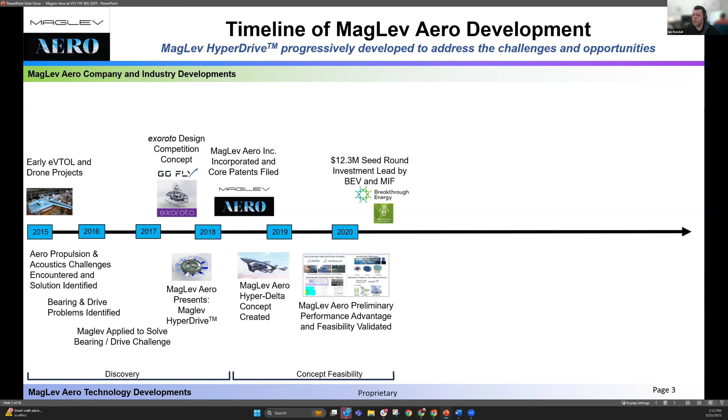So brief history, worked on a few projects, ended up spinning out from a competition called Design. It was the Boeing Go Fly competition, where the objective was to design, build, fly, test a small under 8-foot VTOL system and fly it in a course. We ended up pulling out of that competition, spinning out the core technology, starting Maglev Aero from that, and worked on the core technology validation, raised a seed from Breakthrough Energy Ventures and Material Impact, filed the core IP, and since

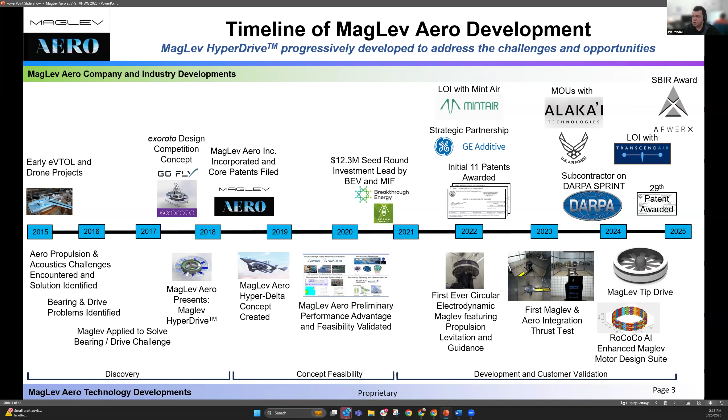then have been busy. We've gotten all of our patents, done a few partnerships, performed a subcontract under DARPA on the Sprint program, and then also developed a demonstrator of the core initial technology platform, which was a maglev rim-driven prop fan with individual blade pitch control, and learned a lot about these maglev motor systems, the losses of an open fan system, and have developed our launch product, which is these tip-driven systems for high thrust capacity.

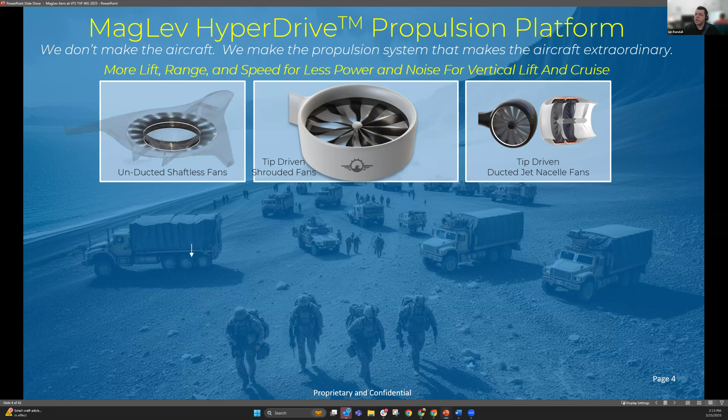So at the overall level, think of us as a maglev motor fan integrated system with a few different embodiments. There's on the left, the hub-driven system that's seen on our website with that tilt rotor, tilt fan in wing around the body system. There are also these tip-driven shrouded fans that leverage a magnetic bearing motor system at the rim of the fan. I don't know if you guys can see my mouse, but at the rim of the fan, that is the similar application with pretty outstanding sets of benefits, and then high-speed applications that we anticipate will follow shortly after.

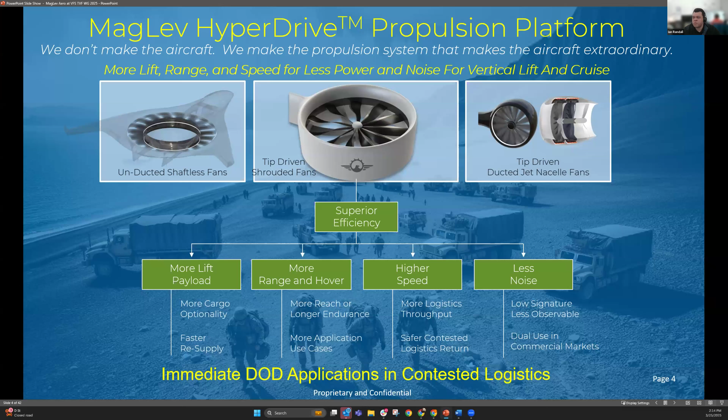The overall net objective is really efficiency. Improving your efficiency has a pretty outsized effect on the overall vehicle performance capabilities. And so that's what we prioritize with these vehicles. And we make sure that we don't do that for higher costs and weight as well. But if you can reduce the power required for VTOL and/or cruise operations, then you open up a lot more space on the vehicle for either payload or fuel capacity for range or endurance, and that tends to matter.

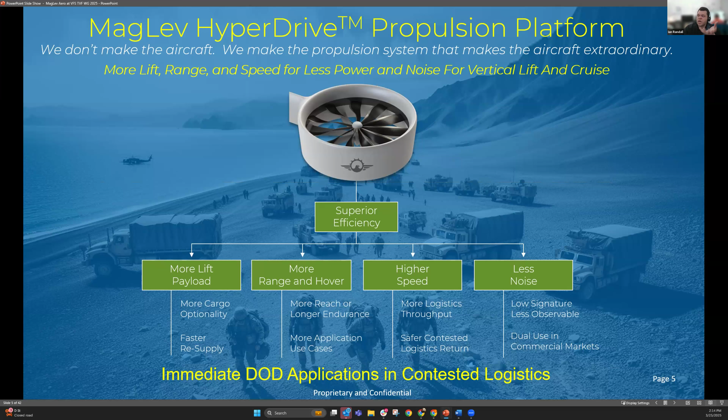So this presentation is going to focus on the tip-driven applications, and this is our tip-driven maglev fan system. We call it the TX series. But high level, we take technologies more commonly employed in high-speed linear maglev, and we wrap it in on itself. And we had good fun making this visualization, because essentially that's what we're doing. It's a big linear motor turned into a rotating motor, which at the end of the day for electromechanics, they're the same thing. This has those two embodiments, the hub-driven fans as well as the tip-driven fans.

So instead of the blades sticking out, the blades are sticking in, and that has some pretty outstanding benefits where we can load and power these things with less losses and higher power density. And so it has two different kinds of embodiments. They are used for vertical lift for fan in wing, fan in duct, fan in tail, fan in body, shrouded fans, where you install multiple or a single one of them in the body of your vehicle for high thrust and high bandwidth kinds of applications where you want these fans in a lift plus cruise kind of configuration.

We also find that the torque and speed of that fan, while good for high disk load hover applications, is also quite well matched for fairly high speed ducted fan applications as well. And so these are two areas that we focus on. And I'm going to be talking to you about the vertical lift applications, because this is the Vertical Flight Society. This is where we make things go up.

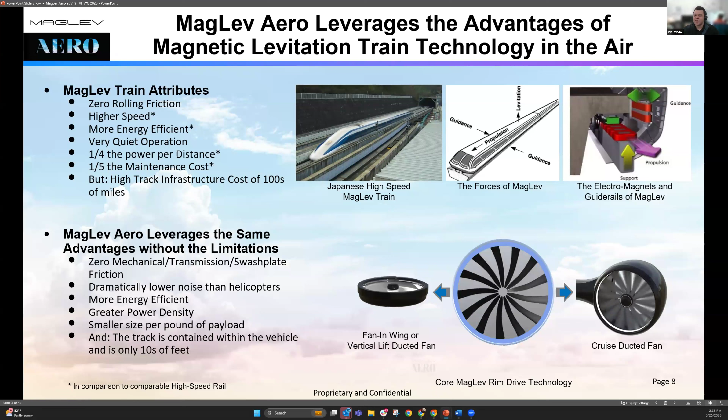The reason why we go sufficiently far out of our way with maglev is because rim-driven things are actually fairly complicated. That's why we don't see too many of them. So rim drive is, you imagine, a big motor, big diameter, very large moment arm. You get a lot of torque per unit mass involved in that system. This is all great stuff. The challenge is that oftentimes when you add a large motor out at a fairly large diameter, it adds a lot of destabilizing forces. Think about it this way. If you were to take a magnet, which I usually have one on my table.

Okay, so I'm going to instead use my pen. Actually, here. If you're going to take a magnet, which is this phone, and your steel for your stator, as it gets closer, it wants to be closer at a much faster rate, basically with the inverse square of that distance. And so if you think about a very, very large diameter motor system,

as the rotor has small deflections just due to the unsteady loading, the imbalance of aerodynamic forces, the inertial loads, the imbalance of the inertial loads, whatever the case may be, as those structures deform where nothing is rigid in these high-speed applications, and as they get a little bit closer, you can create fairly large, attractive destabilizing forces just from the electromagnetics of a large motor system.

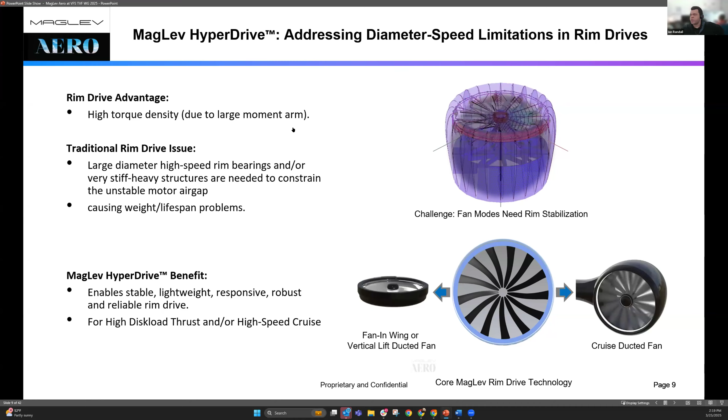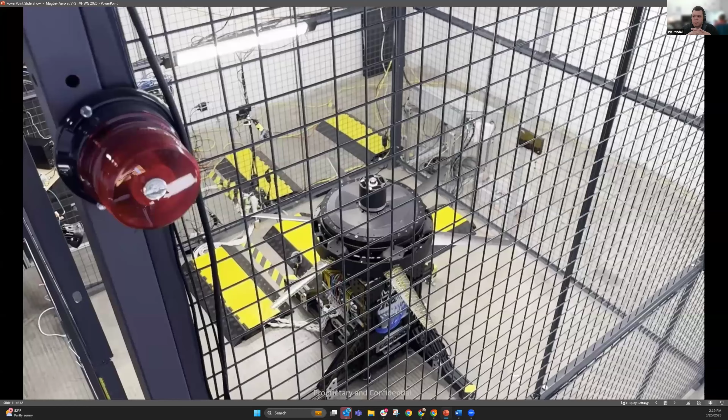This is a quick video of our test rig where we kind of pulled everything together. It is, I guess, the first maglev motored prop rotor with individual blade pitch control. I don't know if it was a milestone that many people were fighting hand over feet to try to get to, but we were the first to do it, which is always fun to be able to say.

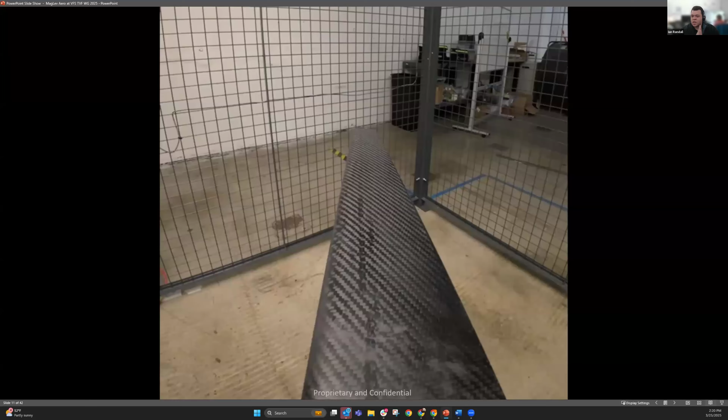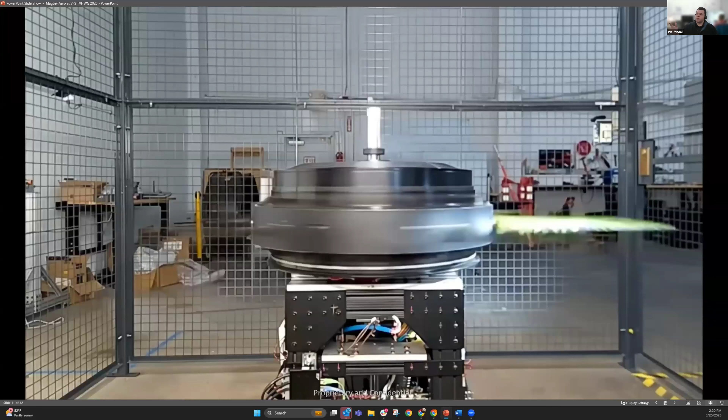In this video, you'll see individual pitch control where we have a servo actuator at the root of every blade. That was important for that large diameter hub-driven system where it has 2 sets of coax rotors. And our maglev motor bearing system all working in unison to be able to produce our target levels of thrust at our target power levels, and make sure that the tool sets that we developed, often from scratch, to do the maglev aeromechanics, basically how does everything shake out and integrate with the aeromechanics and the electromagnetics, are all accurate.

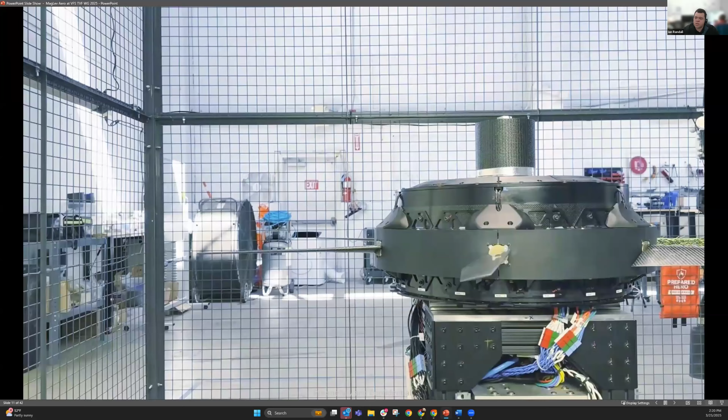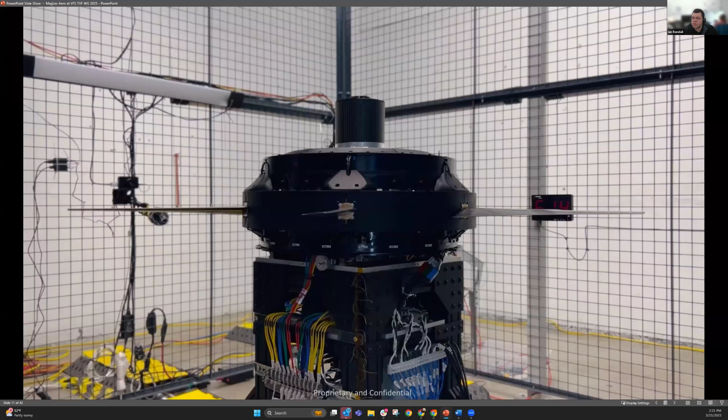So that rotor system is hollow, but inside of it is a large set of measurement devices, a very flexible circuit where we can configure it for either active or passive control or passive dynamics, a 6 degree of freedom force transducer, vibrometers, many temperature sensors, many laser distance measurement devices, many other different state estimation devices, and it has been a rig of ours that we use to validate the tool sets that we use to design these things.

So what are we doing next? We're doing this tip drive next, and I have a prop next to me because props are fun. These tip-driven propulsion units we found address a critical need in some of the challenges associated with producing a fairly large amount of thrust in a fairly confined space and not suffering from a fairly egregious power required to be able to produce it. And so we have our maglev rim drive on the outer portion.

We have internal bearings that help constrain certain motions of the rotor, but as you can imagine, that's a very long distance between the blade and the motor system, and so over that distance you can have various deformations that either need to be mitigated or stabilized, or the effects of potential crashing events between your rotating elements and your stator elements need to be mitigated one way or another.

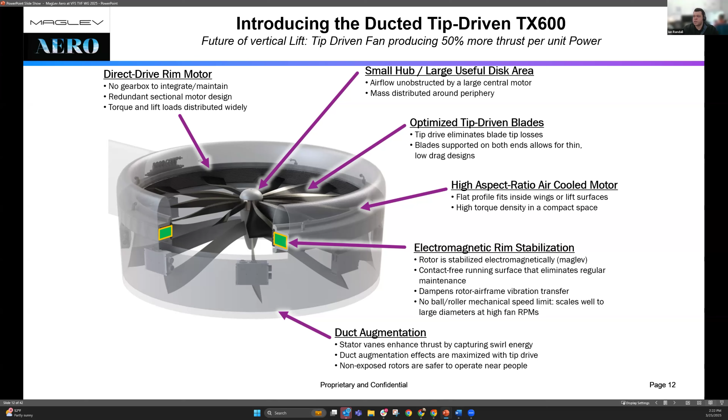And we have a series of inverters distributed around to help power the system. This allows us to have much better duct augmentation, much lower losses in the blades, and deliver the power with a higher power density overall. So the key thing that I'm going to get at actually is going to be the tip losses. If many folks in this community have worked on ducted fans, you probably remember the fairly severe relationship between the tip clearance of your blade and the overall duct hover lift augmentation efficiency factor.

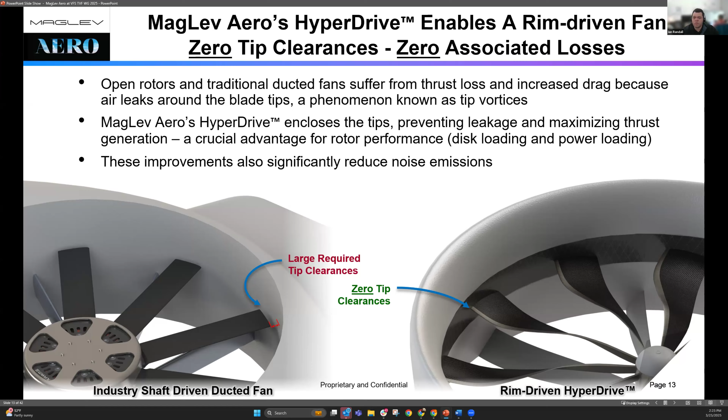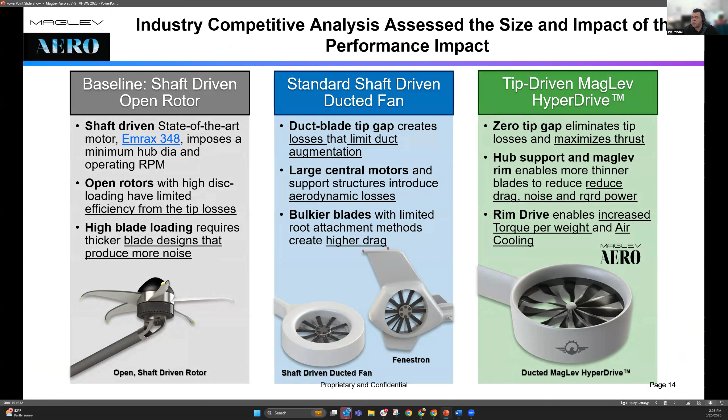And so with a tip-driven solution, you can close off that tip leakage factor, and that has some pretty severe effects on the overall efficiency. So we'd have a very quick comparison between a hub-driven open rotor with an Emrax 348 water-cooled or water glycol cooled, that same Emrax 348 powering a ducted fan or a fenestron, and our maglev hyperdrive TX system, all the same diameter, I believe same tip speed as well. And so, general net difference.

And if you think about sound, it's the rate of change in pressure per unit time. Like a speaker, if you have something actuating a lot, it's going to be a very large source of noise. That unsteady loading can be 20 times louder than everything else in the rotor system producing noise. So it's a fairly tremendous source of noise for the overall system.

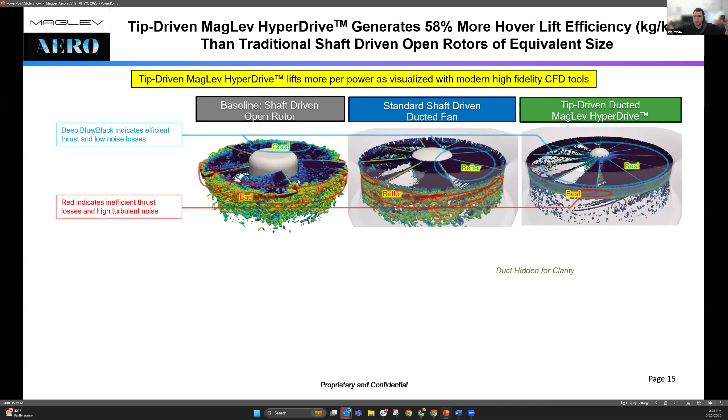So the better you can keep air attached to that surface, the more duct augmentation you can get from it, and the more thrust you can get for the limited area and power that you may have. So a tip-driven shrouded fan solution allows you to keep the air from leaking around the blades, which introduces less vorticity into the downstream of the fan, which promotes better flow adhesion to that duct surface. So for the same duct geometry volume, you can have much higher duct augmentation factors.

The net difference is fairly astounding, 62% more than open fan, roughly 15 to 18% more than the ducted fan. We also have some results showing more dramatically improved cases as well. And one thing to note as well is that there's no large blockage in the flow stream due to the motor on the inside. So we have a much smaller fan core, which helps us maintain flow adhesion to the sides of the ducts as well. So there's less dramatic change in duct area per unit distance down the duct.

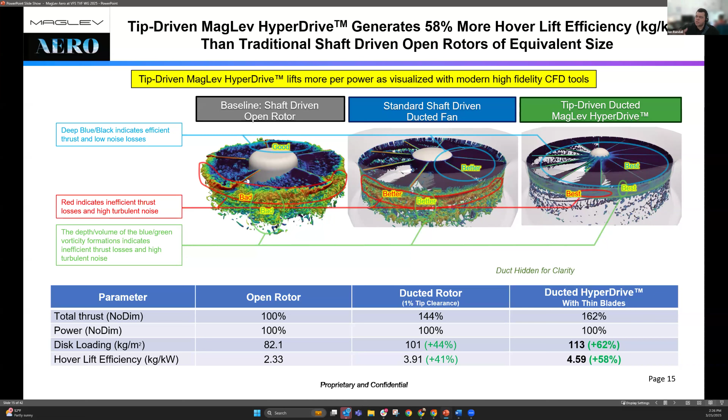So the net effect is for a similar amount of weight, however, ours not needing to be water cooled allows us to reduce our weight slightly in comparison to the conventional systems. The same amount of power required, you can have a fairly tremendous amount of additional useful load. That's thrust in excess of the structure, the power systems, the weight of your devices, and the benefits can be fairly tremendous. So for 48% more thrust per unit power, you can have 230% more useful load.

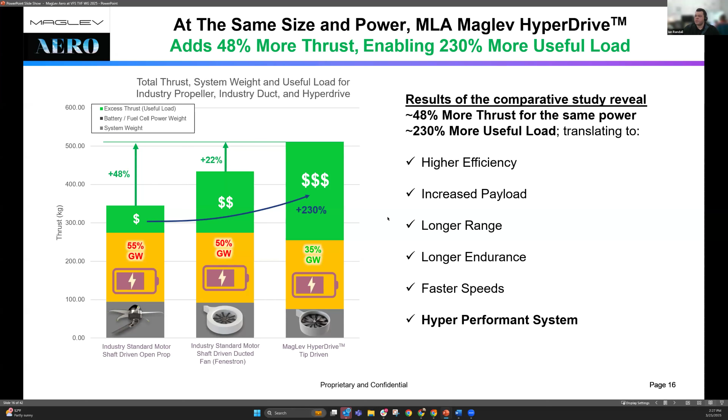And however the airframer wants to use that, whether it's payload, additional structures for harder landings, safety systems, fuel, endurance or range, it's up to you, but it's more flexibility in the design space. So a few different ways you can imagine using these hover lift systems: very simple lifters, or you can put it into some more complex compound lift plus cruise kinds of vehicles, like a blended wing body, longer range slipper vehicle.

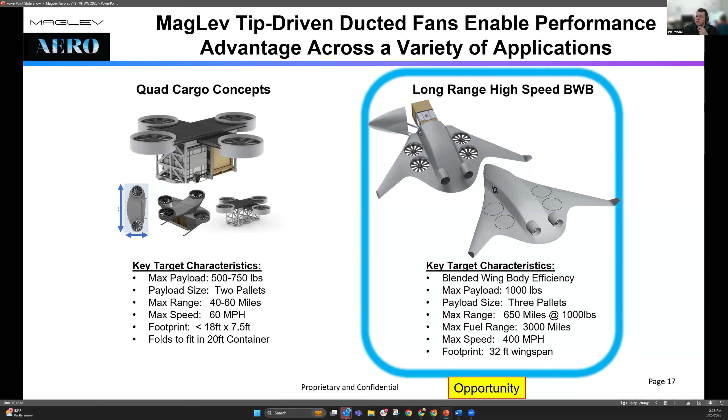And this is a really cool opportunity, I believe, because we haven't seen many of these kinds of vehicles, and I think there's a good reason. But before we jump into that, I just want to say I'm excited about what is happening in commercial aviation with JetZero, Natilus, and Airbus's ZEROe efforts. This is an exciting time in general to see this happen.

And the blended wing body, if you're not very familiar with it, has fairly tremendous improvements in overall efficiency, range, mass, structure, drag, fuel burn, all of these things for a bunch of different reasons, but the one that I think is the easiest to understand is where the mass is distributed in the vehicle. The aerodynamic loads also are similarly mated to and distributed similarly.

So you don't transfer loads a very long distance in these vehicles. And so for an overall set of wetted area or wetted drag of the vehicle, you have the exact amount of wing that you need, and you have the smallest amount of additional structure that you need to be able to react against bending or shear loads on the vehicle. So it provides a pretty exciting opportunity in the vehicle design space to be able to improve the overall efficiency and reduce your fuel consumption, improve your speed, improve your lift to drag ratio, a bunch of very exciting things.

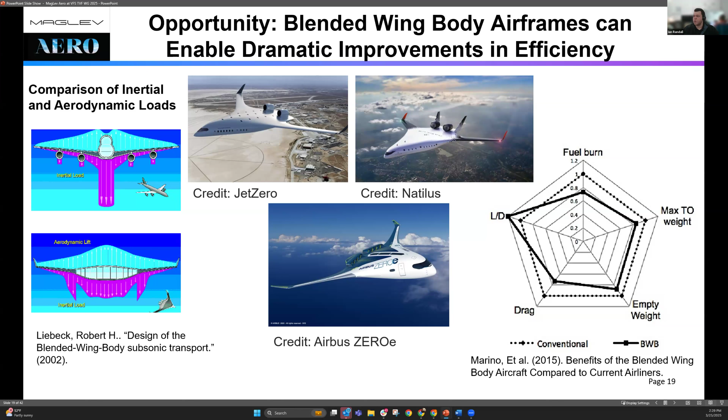So why haven't we seen VTOL blended wing body ducted fans? Ultimately, the things that high-speed, long-range blended wing body ducted fans like: you want to keep the minimal amount of excess wing area so that your cruise drag can be as small as possible and you can operate at your airfoil's highest lift to drag ratio. You want to keep the wetted frontal area as small as possible so that it has the lowest overall drag. And you want to have the largest internal volume for fuel, and in this case, liquid hydrogen, which is not the most volumetrically dense substance. But I guess batteries may not be that much better.

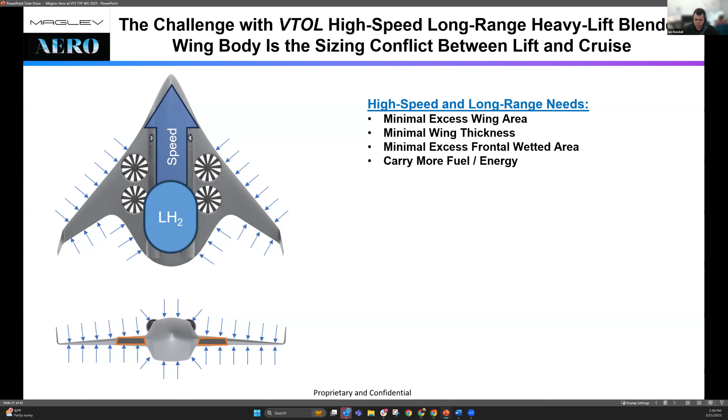But that being said, these things tend to disagree, or they don't comply as well with what you need for vertical lift. Vertical lift, you want the biggest area possible for your duct systems. These things want to be able to accelerate the largest volume of air, the smallest velocity delta into that system to decrease your power as much as possible. So you want to have as big of a fan as possible so that you can have the lowest power required as possible. And if it's a ducted system, you want to have the longest, deepest duct possible so you can diffuse the air to an even larger volume as much as possible.

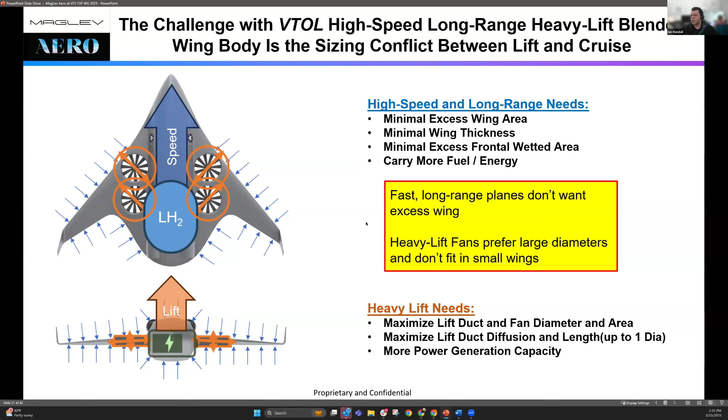And these things, unfortunately, coupled with the fact that you need power, not energy. Power is a much more constraining factor for vertical lift systems, which is very different than energy density or volumetric energy density that you need for cruise. And so these things don't agree with each other, and they make it fairly hard to close a design that is net better than what you might be able to do with adding some props onto a flying wing kind of a thing, with an H-frame kind of configuration. So it's not been worthwhile to try. Ultimately, if you can improve your hover lift efficiency, we believe that it could be worthwhile to try, and that's what I'm going to talk about here.

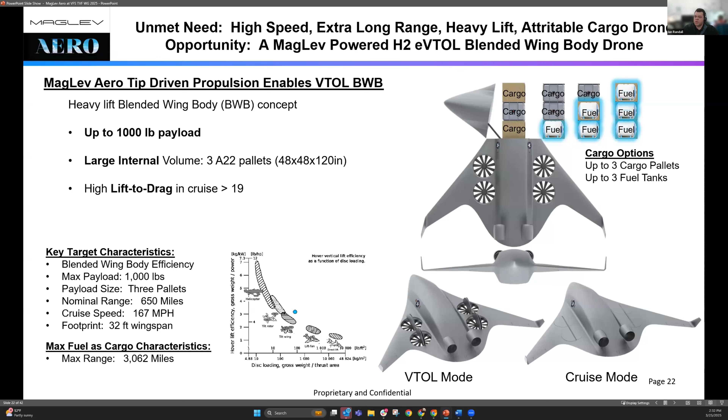So this is a vehicle concept we put together so that we could share these results and have a discussion around it, because oftentimes when we work with folks, those are their proprietary designs. So this is not necessarily a vehicle we're building right now, but it's a concept that can show our net impact on a vehicle platform. The targets are 1,000 pounds of payload, an internal volume of 3 A22 pallets, a high lift to drag ratio, and leveraging stowable lift fans with our Maglev rim drive in a lift plus cruise blended wing body configuration, with the objective to achieve fairly high range targets.

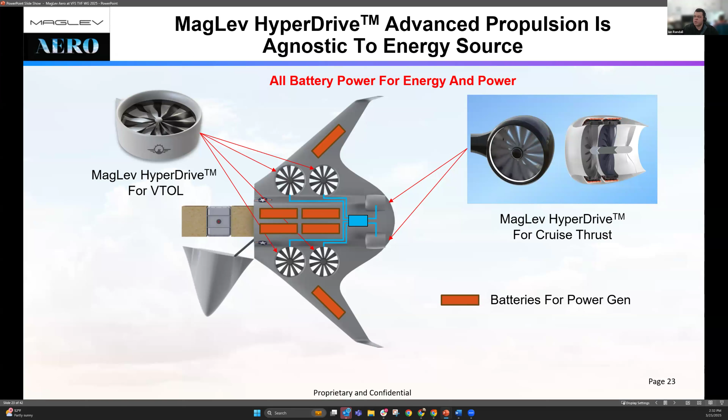Just to clarify, our propulsion unit consumes electricity. So it doesn't really matter where the power comes from. It could be battery electric, it can be hybrid electric, it can be hydrogen hybrid electric. Where the electrons come from doesn't matter, but we're going to talk about liquid hydrogen in general as a use case here.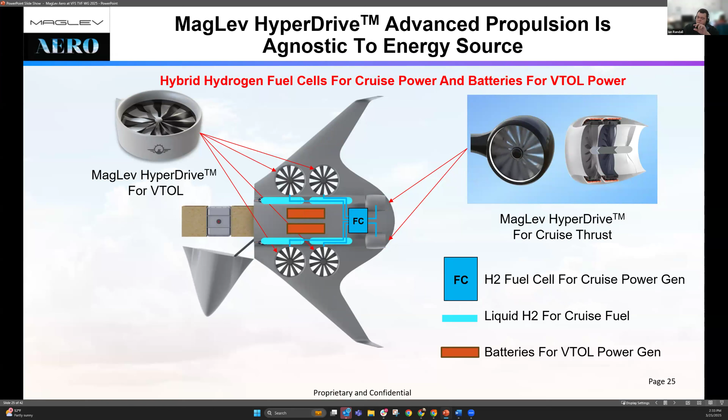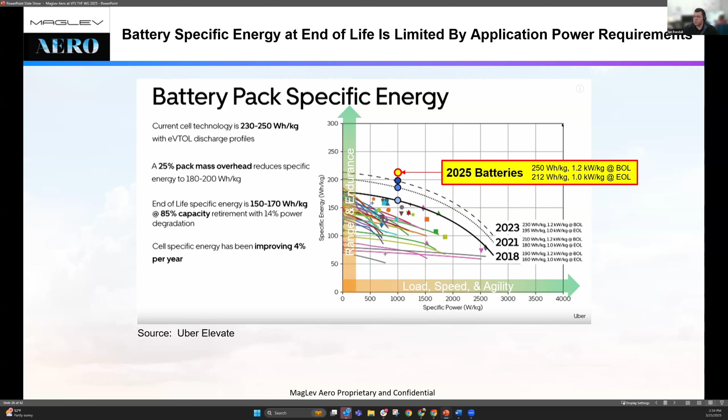So this is a great plot from Uber Elevate back in the day, where Mark Moore showed where battery systems lie on specific power and specific energy. The higher up you are on the chart, the more energy per unit mass you can carry on board, and so the lighter weight your battery is going to be. The further to the right you are on this chart, the more power you're able to deliver during fairly critical phases of flight, like vertical takeoff, climb, and dash opportunities. So ideally you're high and to the right on this chart for the power systems involved, but it doesn't always tend to be that way.

The challenge with these systems is that fuel cells have better power densities now, but when you add redundancy into those fuel cell requirements, it severely impacts the overall specific power of that system, making it a little bit difficult to make VTOL by itself work.

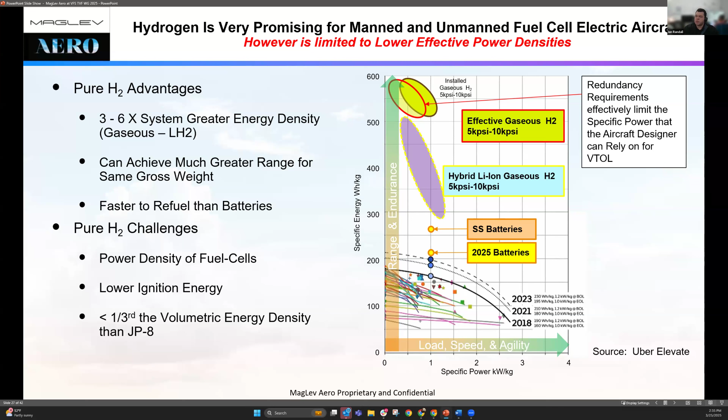And so what we oftentimes do is we hybridize it. We add some buffer batteries to that platform, which then puts you on that slanted purple line here, where the more buffer batteries, the lower the overall specific energy, but also the higher your specific power can be as well. And you augment hybrid powertrains with some high specific power boost or buffer batteries to be able to fill in the gaps of your fuel cell.

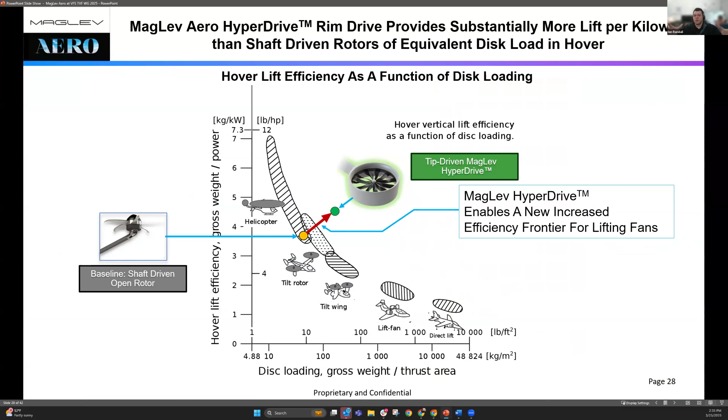So if you can move yourself off of the conventional hover lift efficiency line and increase your power loading or your hover lift efficiency for a given disk loading or duct area, then what is the overall impact for such a vehicle with hybrid systems? So ultimately, the study that we're going to be sharing here is a slightly higher disk load than what you normally see in the eVTOL space. It's not as high as Lilium or some of the very high disk load applications, but it is a little bit higher than your tilt rotor and tilt wing disk load region.

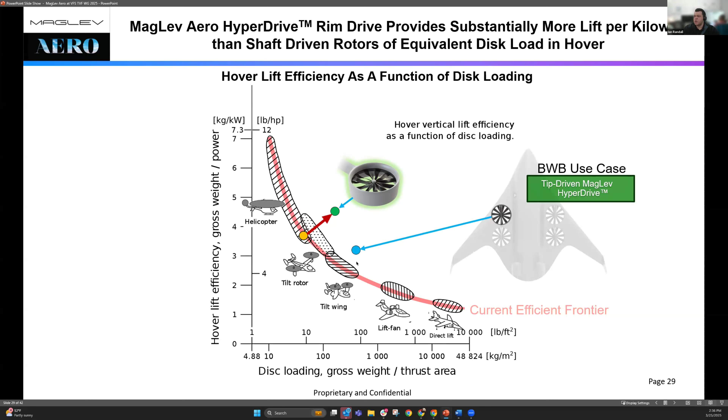But even this improvement in hover lift efficiency has a pretty large overall impact. One thing to note as well is we've trained a lot of our tools and built surrogate models and seen where surrogate models tend to like to go when they're given fairly abstract objectives, and they show opportunities to even further improve the performance from where we are today in our simulations. So there's exciting opportunity ahead, we believe.

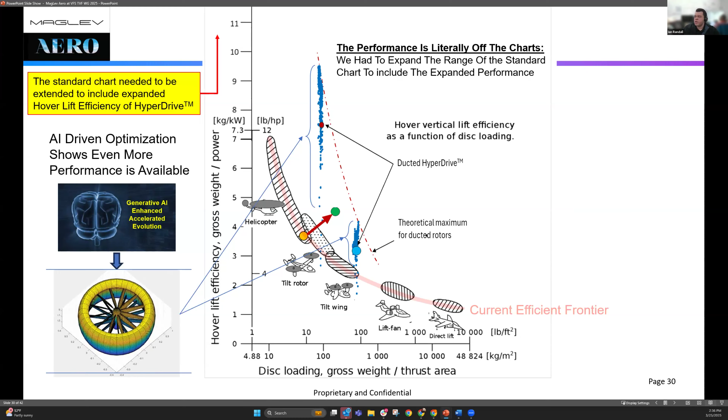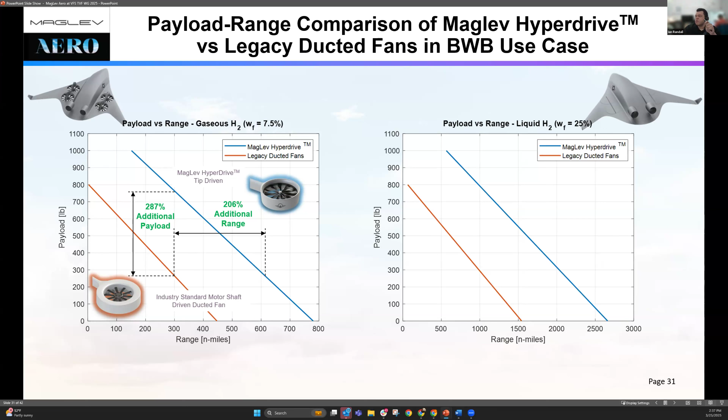Now, what's interesting is that becomes much more interesting when you're talking about liquid hydrogen, which instead of having a weight factor of 7%, meaning the weight of the hydrogen in the tank is like 7% versus the overall tank plus fuel cell, the weight of the hydrogen in the tank can be much more significant in comparison to its enclosure, around 25%. And the difference can be additionally 270% more payload or 200% more range, but now you're talking about pretty compelling range capabilities for such a slippery high lift to drag ratio vehicle, reaching from 1,000 to 2,000 nautical miles.

Now, of course, we did a really coarse mission study. I think the term is zeroth-order approach, but generally speaking, we're pretty excited about the implications of such propulsion paired with advanced airframes and vehicle systems that are available to us through the advancements in controls and in design tools, et cetera. So high level, better hover lift efficiency can have pretty outsized effects in payload.

And as for the vehicle designers in this room, we've all experienced this more in the latter, where something is not as efficient as we think it is, and therefore the consequence is quite painful. But when things are more efficient, the implications can also be quite impressive.

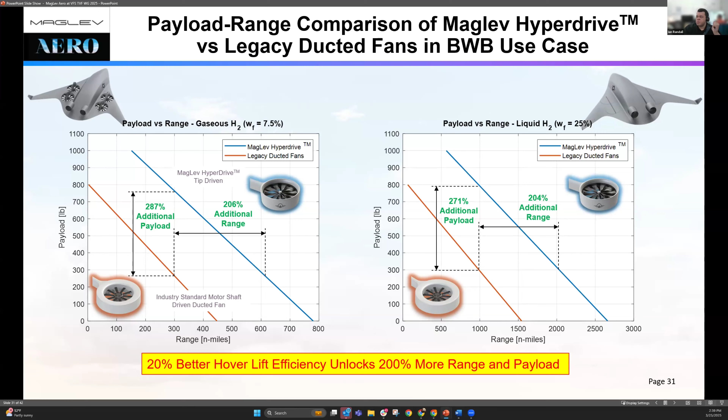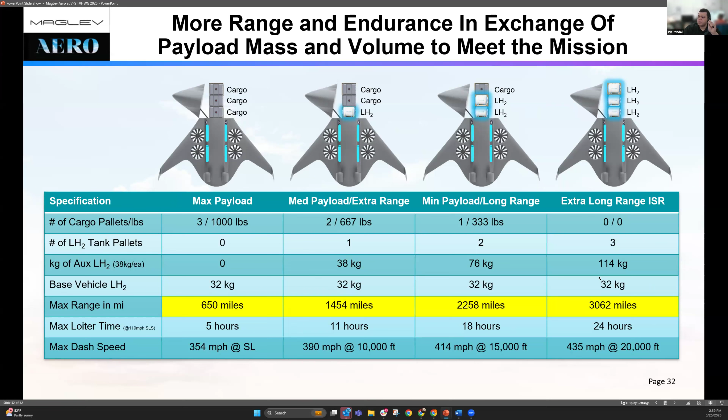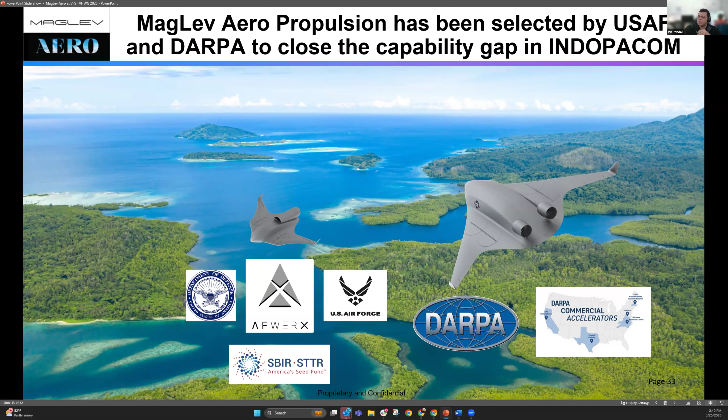We're working with a few partners in the Air Force and in DARPA, and we're always open to more partnering opportunities to understand how we can better help and enable new outsized capabilities. This is more or less what I got. Thank you, guys. We're starting with cargo in defense applications, and we think they can transition to cargo and commercial applications. And then, of course, we'd like to get to passenger vehicles, but it's going to be a minute before we do that. Thank you, guys.

That's what I got. So love to have a discussion if possible, or whatever the next steps would be. All right. Thank you so much, Ian. Every time I listen to your talk, I feel like I'm drinking from a fire hydrant. I apologize. That's packed information, and many of the points you make I can absolutely relate to, having been working on ducted fan and stuff like that, so truly appreciate this information-packed presentation. So open to the floor, guys. Yeah, let's ask some tough questions. Please, please.

While folks are thinking about their tough questions, I do have one for you. Now, it looks like the aerodynamic enhancement, for us aerodynamicists, it's a dream come true. Virtually, you have no tip loss, and all the complex problems, and the ability to maintain a tight gap on the ducted fan, that has been a central challenge. So we solved some of the problems with a lot of penalties: structure, weight, complexity, cost, and so on.

Now, the way that you were able to devise your outer-ring-driven ducted propulsion system, for the net equivalent, say, same lift, is the system that you were able to demonstrate in the same weight category as the conventional ducted fan, or a larger open rotor? How's the weight and complexity comparison in your mind?